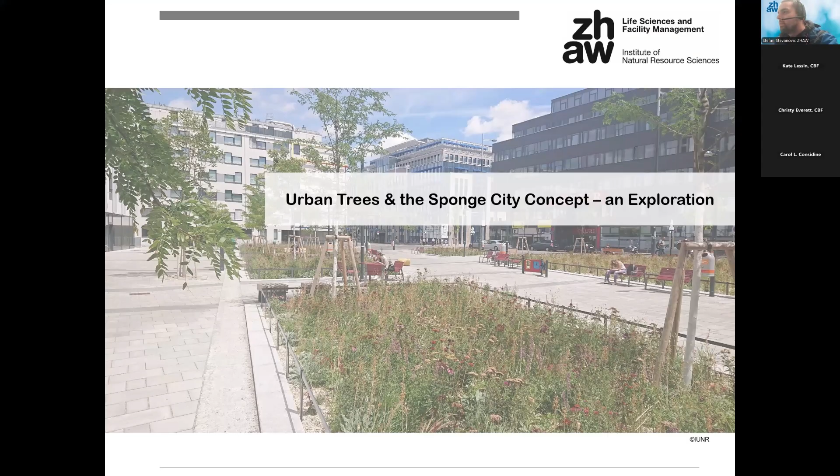But in any way, I will warm up and give you hopefully interesting input how we are dealing with rainwater and urban trees, and help you hopefully with your challenges and your difficulties.

So to start off, it doesn't look like that right now, unfortunately, but that's the campus of our school, Applied University in Switzerland, in Zurich. We have a wonderful view over the lake, and we have a little bit of a view on the mountains when it's not cloudy and foggy and cold. So a really nice place where we can do all kinds of experiments and projects.

And I wanted to make you guys a little bit jealous as well, since you have better weather, or warmer weather than I have.

Switzerland is usually known for cheese and chocolate and maybe banks and money. But also hopefully at one point for sponge cities. Some people call it sponge cities, other countries call it water sensitive cities or sustainable rainwater management and so on. Sponge city comes from China. They were the first ones who called it that way.

It's a concept. They described it the first time as a city that acts like a sponge, and they noticed after a short period of time that you can't really say what is acting like a sponge or not. So they had to define it a little closer: it acts as a sponge if the water gets absorbed, stored, allowed to seep through, purified, and as a last measure, released into the canalization, the sewer system.

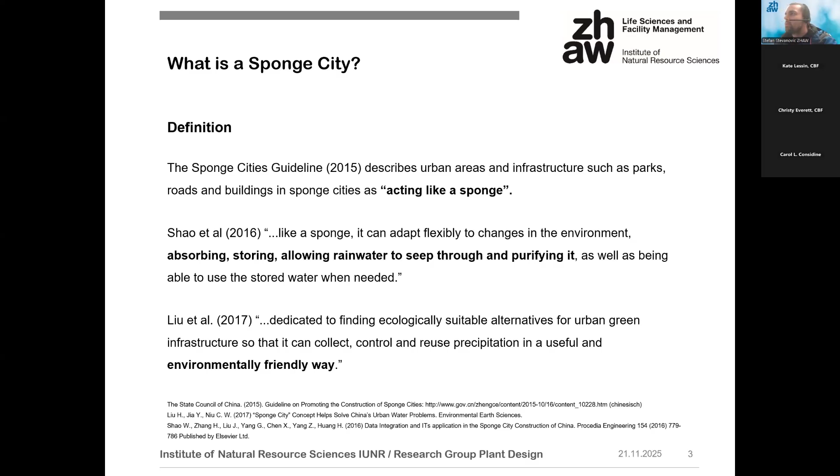One year later, Liu mentioned as well that it's not just to deal with the rainwater, but also to use it in an environmentally friendly way, as close to nature as possible, which was kind of the final sponge city definition. Until today, there's not really a definition that sums everything up together. But that was the idea. And it was also a starting point to no longer see rainwater or stormwater as part of our sewer system, but more as a resource. We want to use it in our cities in some way.

For those reasons, they had to set some goals to reach, where they said 20% of the urban area has to be under sponge city standards. Now you're maybe asking yourself, what's the sponge city standard? They said 70% of the precipitation has to be used locally until 2020, and until 2030, 80% of the precipitation. I was in China last September, which was a really interesting experience, and they were capable of implementing that pretty quickly since they don't have such bureaucratic ways, not so many administrative challenges.

And they didn't just say we have to use all the water locally. They also said each sponge city measure has to have infiltration, retention, storage, purification, evaporation, and then, as the last, drainage. So every time they built something for the sponge city, they had to fulfill those standards. And when a city reached those 20%, they called that city a sponge city. It's also important that they focus on the current state of the ecosystem and so on. It's not just constructing a building to reach that goal, but also seeing what else is going on around.

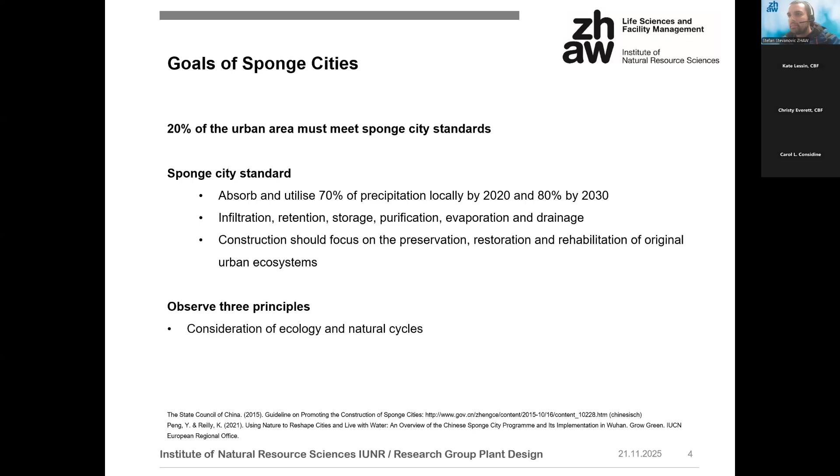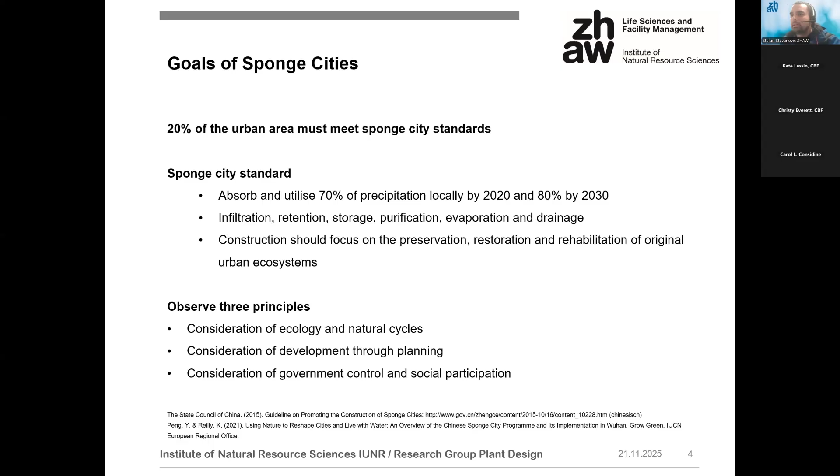They also had some principles. It was important that they keep some kind of natural cycle and also use the water in a cycle, that they consider the development of current planning, governmental control of whether everything is working as it's supposed to, which is less of a thing here in Switzerland, and also some kind of social participation when they implement these measures. That idea in China came mainly because of many floods and so on.

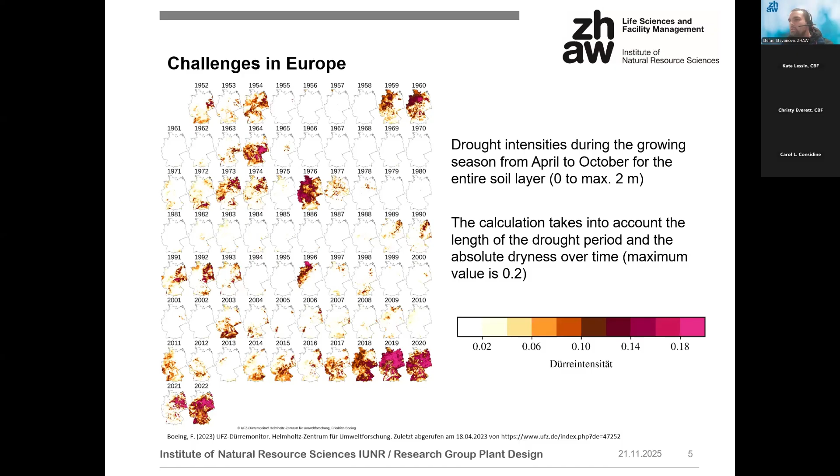And in Europe, we are blessed with enough water. But what's even worse are the summer periods. Take the example of Germany, because they collected this kind of data: we have really dry summer periods, which is not just a problem on the surface, but also in the depth. We have complete dryness up to 2 meters into the ground. You see the maximum value would be 0.2. This pink color is the absolute maximum dryness that we have. And you see between April and October, we have complete dryness up to 2 meters, which is a huge problem in nature generally.

In Germany or Switzerland, it's not that common that we have forest fires and so on. But suddenly we have these kinds of problems, and you can imagine how it looks later on in the city. Two or three weeks ago, we had a new study by the best scientists in Switzerland, who collaborated and tried to simulate the weather in 40 years.

And yeah, it looks like in 40 years, in the worst case scenario, rain events that we had every 100 years will suddenly happen every 30 years. And heat periods of 4 days over 30 degrees on average, which so far were a normal standard, happened 4 times per year in Switzerland. Now in the future, we will have 25 to 35 days.

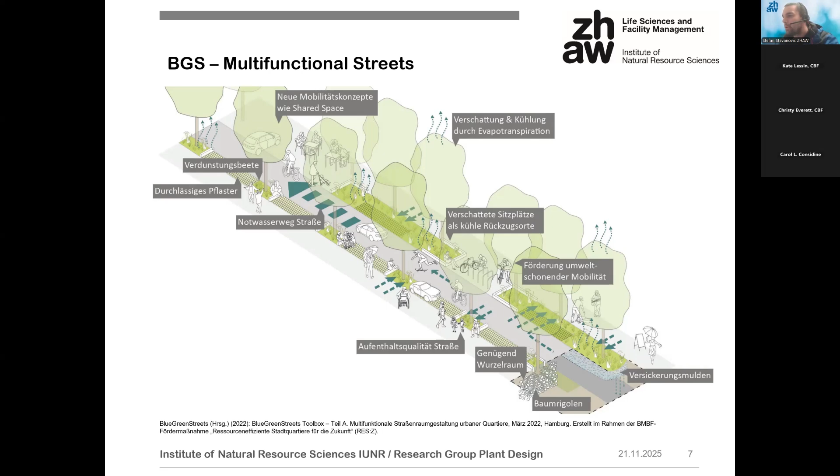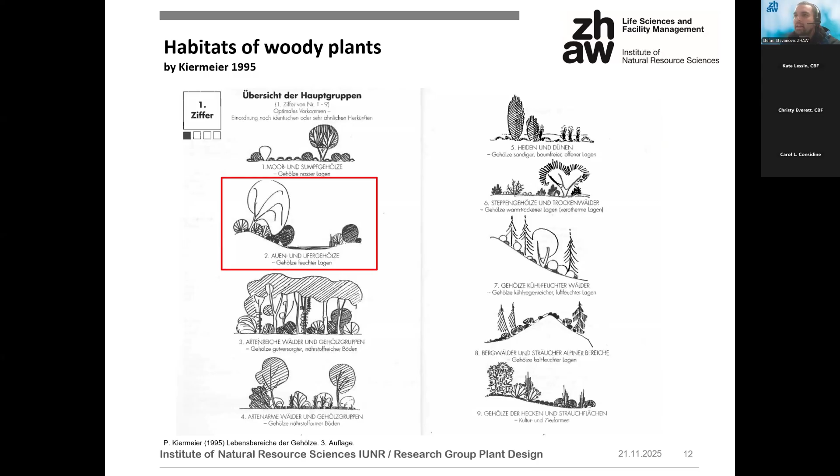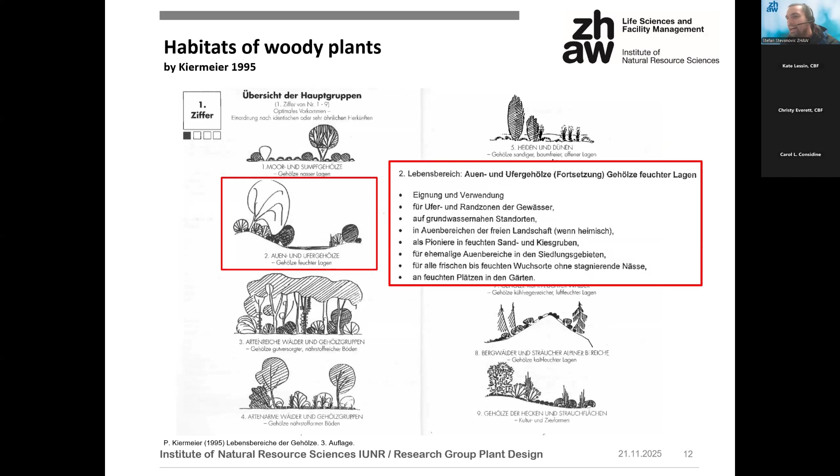And when we build a sponge city, or want to use rainwater, we look at trees that already know high groundwater, strong rain events, but also dry periods. So this is the area where we look at which types of trees we have. Unfortunately, everything is in German, but maybe you can translate it later when I send you the slides. We have Kiermeier from 1995. He selected different tree species by the regions where they live.

And the same thing we can also do in Switzerland. We have these glacier holes, made by ice and snow and coldness, as it is right now, where we have also some kind of cascade and water management that flows from one hole to the other, that we try to implement into the cities.

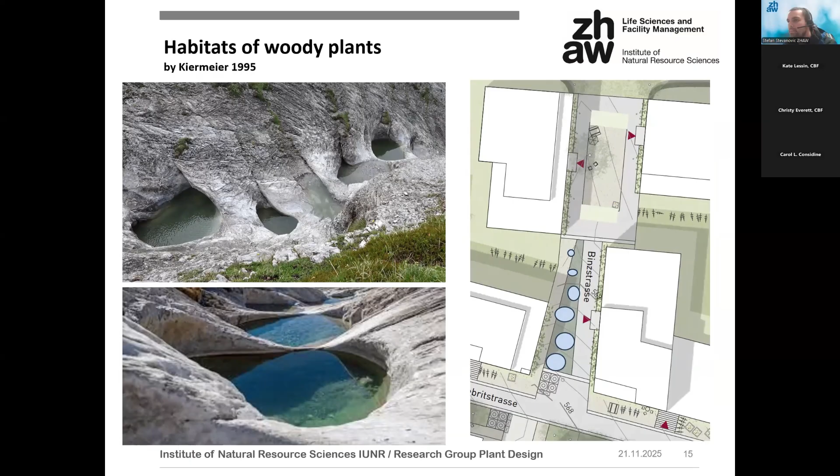This is a project in Bern, but this kind of environment is also a natural sponge. Maybe you don't see it in the first place, but when the snow melts, we have floodings, and the water can flow pretty easily from the left to the right and get soaked up in this kind of soil environment with a lot of gravel stones that create a lot of volume under the ground, a retention area. And we have this well in the city.

If your imagination is a little bit wider, you see the mountains in the background, you see the green area and the freshly implemented trees and vegetation under these rural circumstances, and you have a big, long river that is now the train going through, but where the water can be soaked up and has some kind of drainage function in the city.

So if I skip one more time back, you see the mountains, the trees, and as well here our little river. I'm going pretty quickly through it because we have limited time. You can ask more questions later on, but I want to share as much knowledge as possible.

So the roots are usually growing outside the tree crown. That's the area where the fine roots are built up, and the fine roots are responsible for soaking up the water and the nutrition and so on. So outside the crown, the tree canopy, that's actually the most important root part of the tree. And if we place concrete around it, it gets really difficult for the tree to absorb any water.

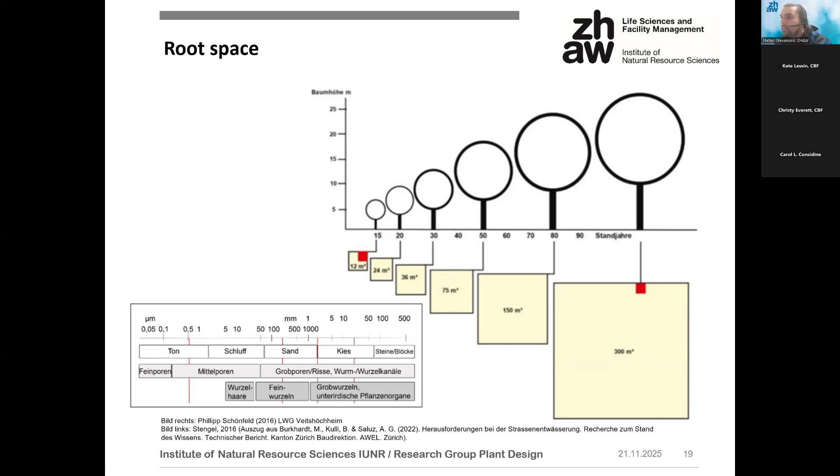And then, of course, the tree will get up to 15 years and maybe 5 meters high, which is not enough to create enough canopy volume over the whole city. And if we want to have 80-year-old trees, we need 300 cubic meters of root space. And if you don't have enough root space, then these kinds of events happen. They have really small roots compared to the crown volume, and then you have one or two storms, and that's enough to break the trees.

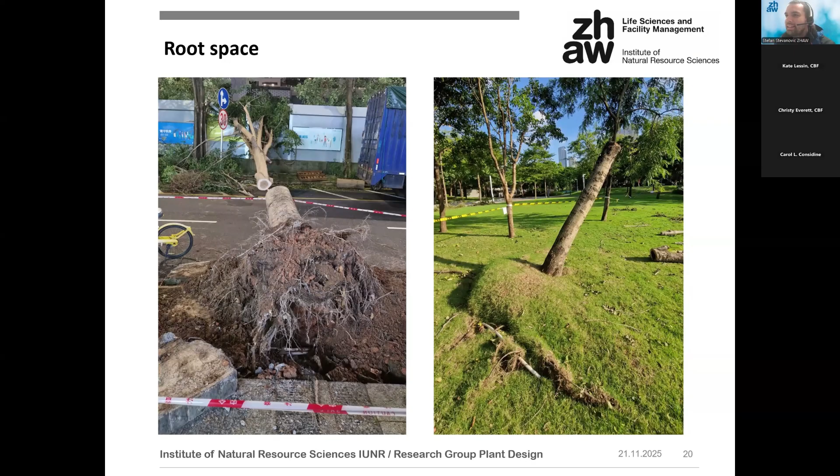In Zurich, we also have a reduction of the tree canopy over the last years, and they said it was not the government's fault, it was the storm's fault. So yeah, political strategies how to get votes, I would say. But actually, it's because they didn't have enough root space.

So we came up with a solution that was invented kind of in Stockholm, but Cornell University also implemented it. Big crushed rocks that can hold a lot of weight from the street built over them, and the pores between them won't be compacted because all the weight is shared over the other rocks. And these big pores will be filled up.

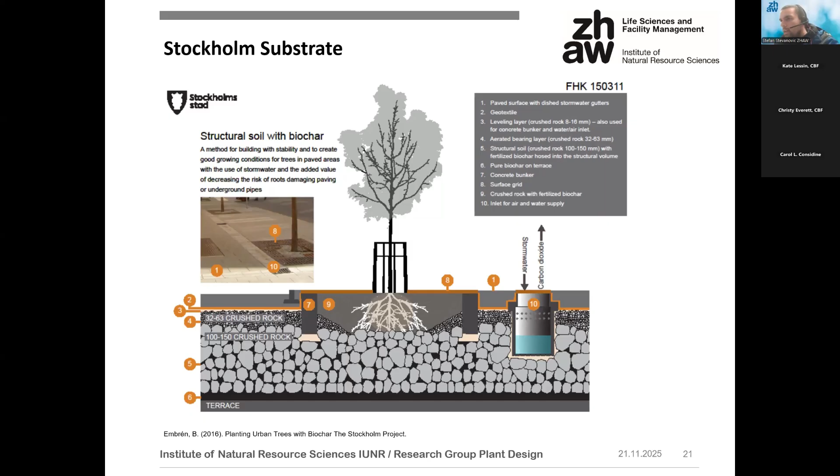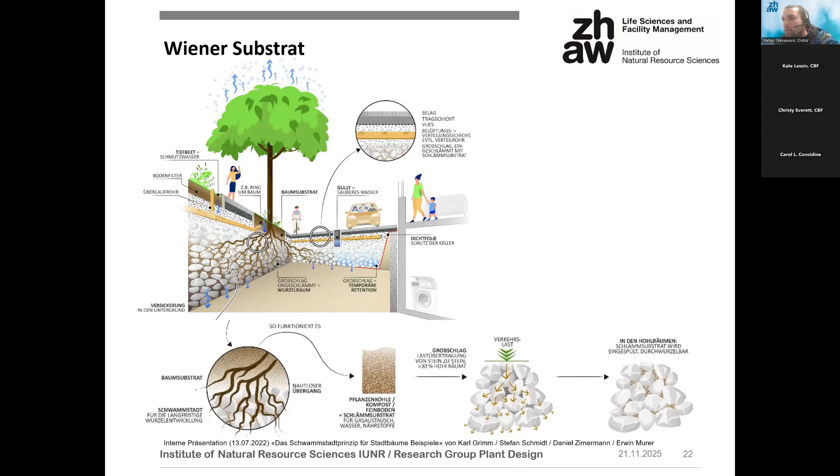In Stockholm, they filled them up with biochar that can absorb more water and nutrition. Later on, the trees can grow through those pores because those are the areas that are not that compacted. And Stockholm also used some kind of inlets for air and water supply. Vienna in Austria did a similar thing, but they used pipes to share the water around it. You also see a nice picture of how the weight from above gets shared over each gravel stone.

And then, of course, we had to implement it in Switzerland as well. The first time we implemented it was in Bern. It's a small Sponge City pilot project, really small. It's a small parking lot.

Bern is our capital city. You see it fits in a small picture of a presentation, not that big, but it's a UNESCO World Heritage Site. That was a little bit difficult to build it in. And for that reason, you see also surrounded by a river. For those reasons, we were allowed to implement our project a little bit outside on a cemetery.

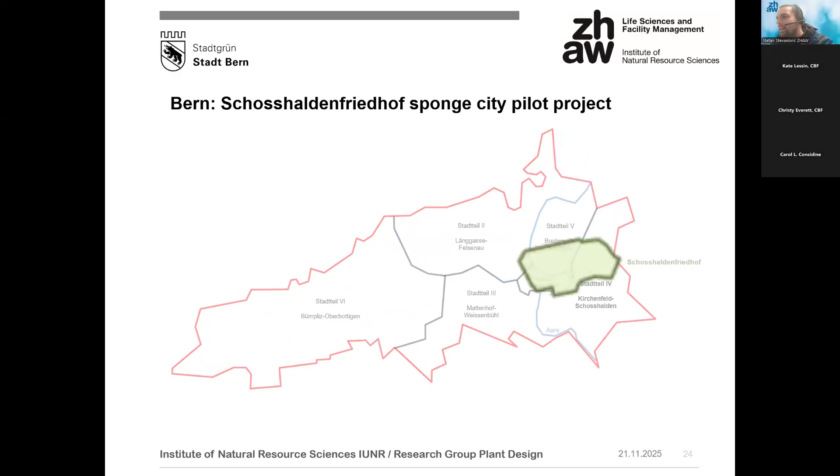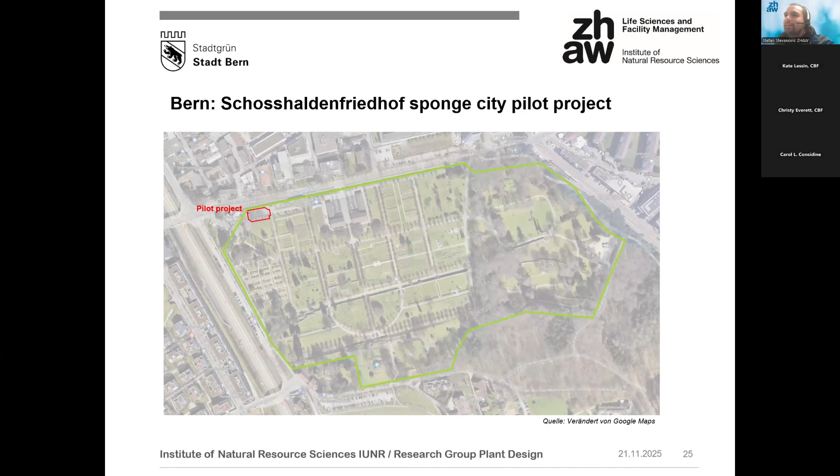This cemetery is a little bit outside because if something doesn't work as it's supposed to, no one would see it. And even in this small cemetery, we got a little pilot project area, a parking lot where we were allowed to implement those trees. We planted the trees in this kind of substrate. You see in the basic layer that we placed it in.

It's also important that on the ground of this area, we have some kind of, how do you say, like a fall where the water flows away or to the tree. Because the worst thing that can happen is standing water underneath the ground. Standing water anywhere in the nature is always bad. That's the area where we have the bacteria. That's the area that we have some fungus and so on, illness. If it's on the ground or above the ground, then we have mosquitoes and so on.

I'm checking the time to hurry.

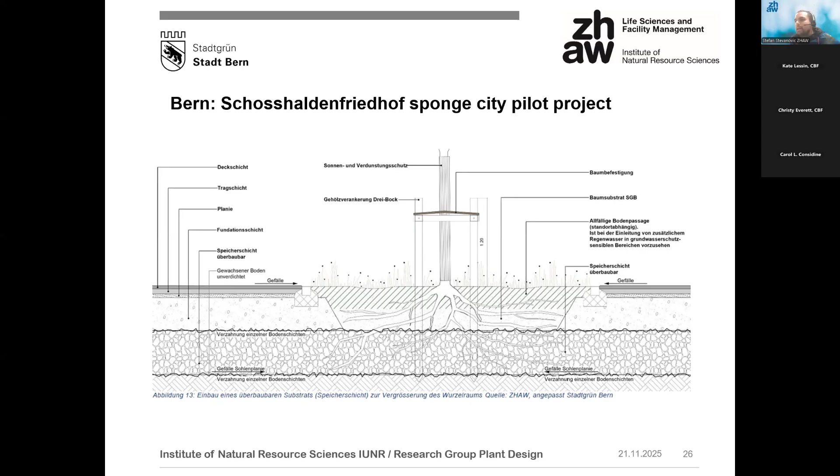And that absolutely should not happen or never happen. So we have this substrate in the lower area, and then we have a little bit of finer substrate that is above. And the goal is that the trees can use left and right underneath this pavement, the area, and get those ideally 300 cubic meters of root space.

This is how the substrate looks like. You see, Bassuk is a US researcher, I don't know if you know her, from Cornell University, that also tested it that way. You see each gravel stone can take up this force. This is the parking lot from above. You see in the middle this green area that was not implemented before. That's where we planted 5 trees. You have the orange area that is like a permeable pavement where the water can flow through it.

We have sensors. This is the red X on the picture where we measure the moisture and compare how the development is underneath the ground. We have also biochar implemented in like dots. This is the white dots or beige dots, where we are trying to force the trees to grow their roots in a certain area and direction, and measuring with transparent pipes into the ground. That's the black dots, where we put a special root camera and take a picture and see if the trees reached that point or not. So that's our project that we implemented and are following up.

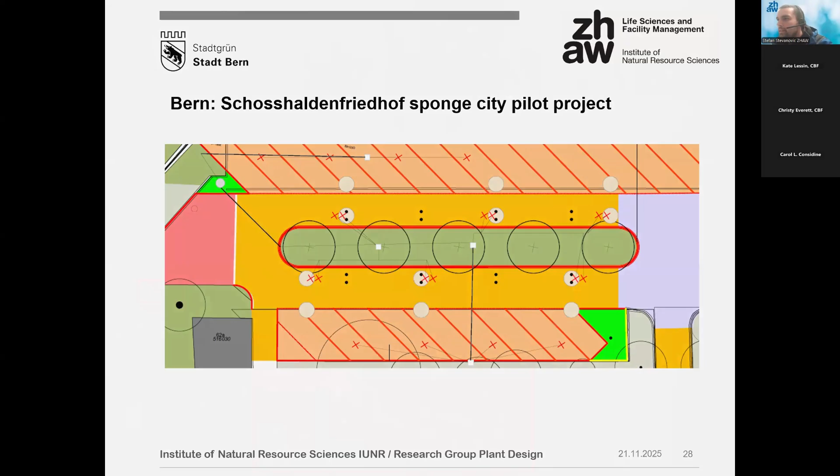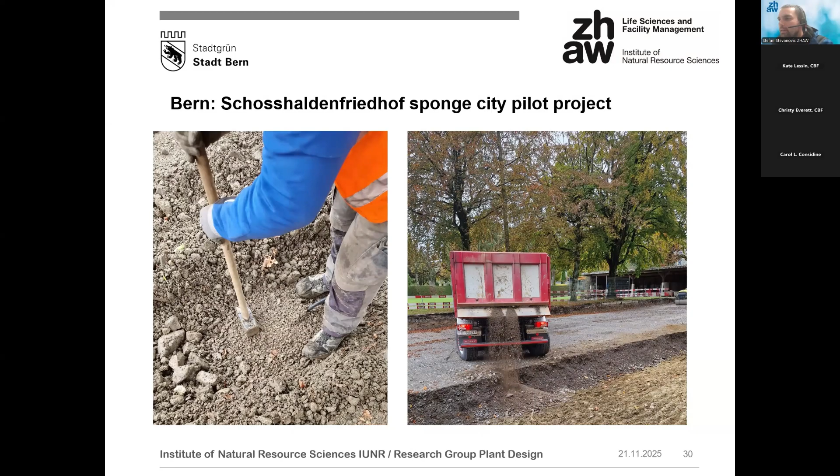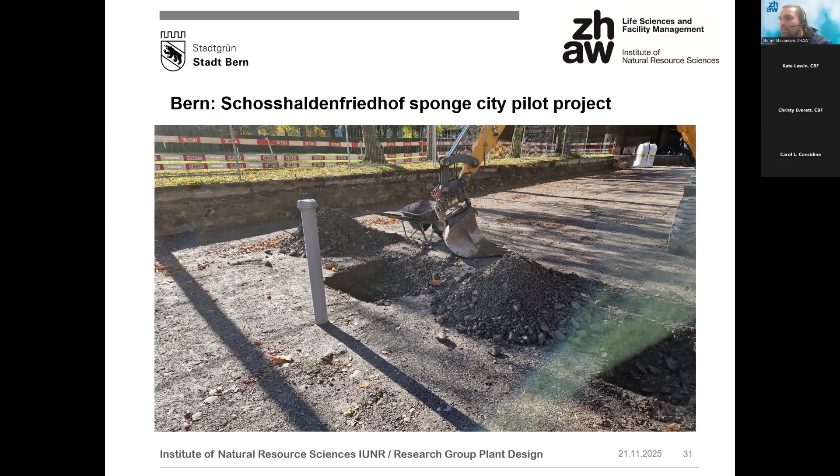This is when we implemented this biochar that we mixed in these little dots around it, where we didn't want to implement it all over the place because the trees should still search kind of for nutrition and not use everything on site. Because the trees, when they come from the tree nurseries, you can compare it, they were in an all-inclusive holiday, enough water and nutrition, and suddenly we cut off the roots and placed them somewhere into the cities where they're under stress conditions.

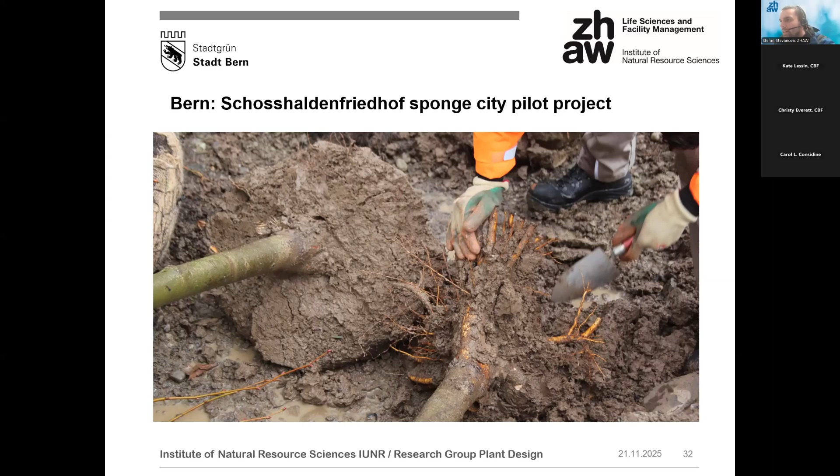You see, it was wet and loamy and horrible for the roots. The roots can fit in one hand, kind of, but at the same time, you have in the back a huge crown. How are they supposed to give them enough water and nutrition to get this big canopy cover that every city and every landscape architect wants to have? That's not possible. So for that reason, we had to prune back the roots that are completely broken. We had to prune above the trees. You see, in the end, it looks like a little stick looking out from the ground.

And that was horrible for the city. All kinds of politicians came out and said, "Oh, how could you do that to our trees? You ruined everything." Luckily, we had the support of the tree competence leader of the city, and he said it's totally fine. Now the tree actually has a chance to grow because the roots are equal to the crown volume. Actually, in nature, the root volume is supposed to be 1.5 times bigger than the crown volume.

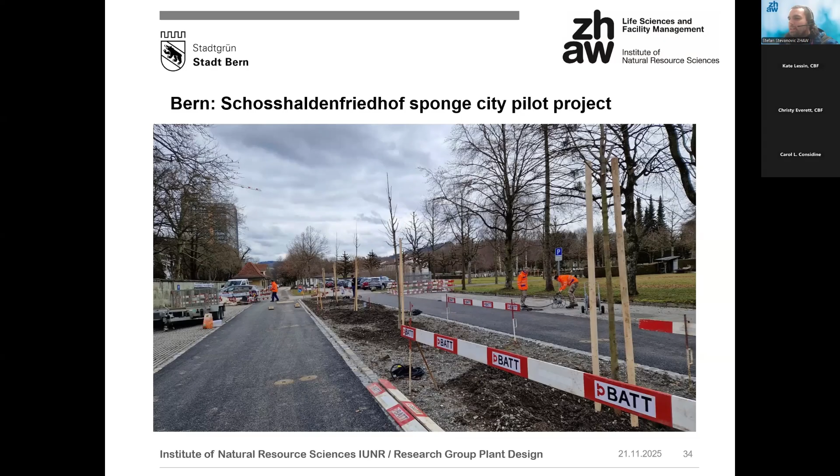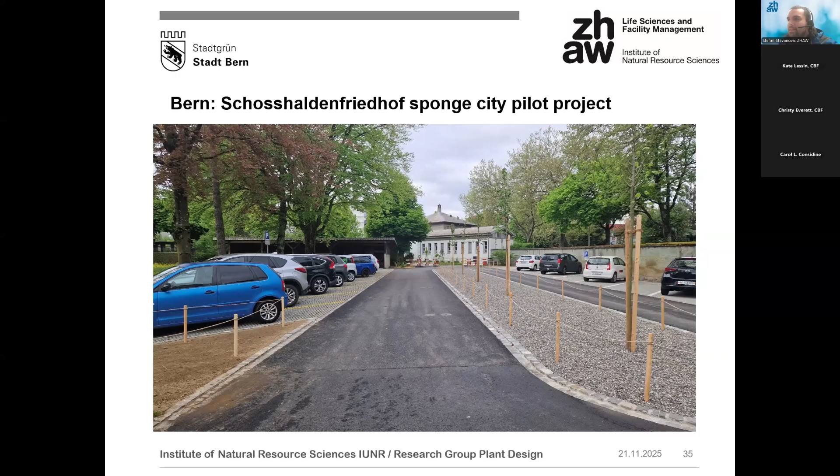And if we plant trees directly from the nursery, usually the opposite is the case. So for that reason, it looks really brutal, but just a few months later, they grew completely back, and now each year they have over 1 meter of growth at that site, and we could prove that this concept kind of works. We also implemented it in Zurich and on our campus, which we are following up. Because of lack of time, I shortened those slides.

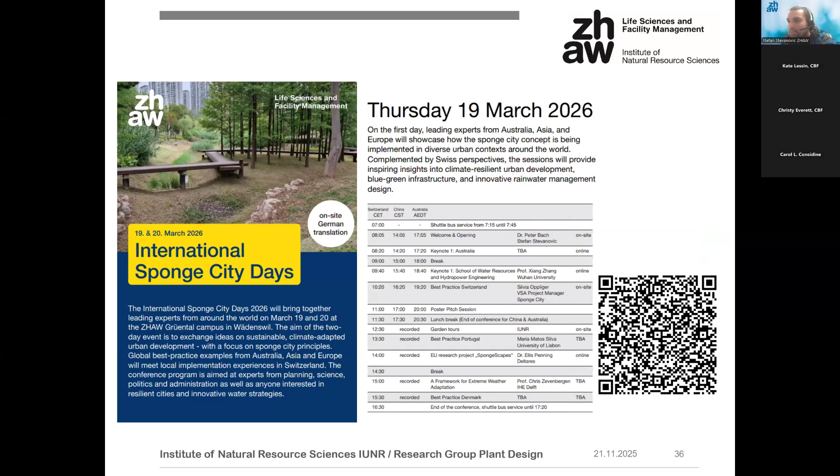You're more than welcome to visit our wonderful campus. It's small and tiny, but it's still wonderful, especially during the springtime.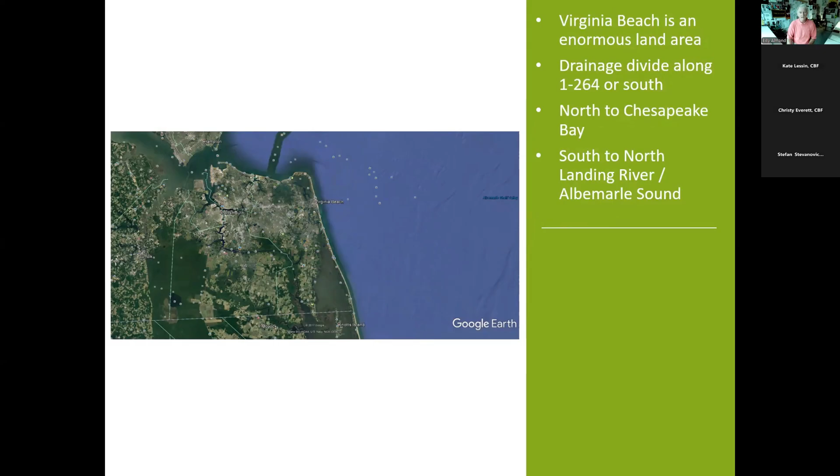We basically have three watersheds, if you will, four watersheds. We drain to the north to the Chesapeake Bay. We drain to the south to the Albemarle Sound into North Carolina, to the east to the Atlantic Ocean, and to the west into the Elizabeth River. All these northern areas are governed by the Chesapeake Bay Preservation Act, and the Southern Rivers Watershed is an enormous watershed that we deal with in terms of design.

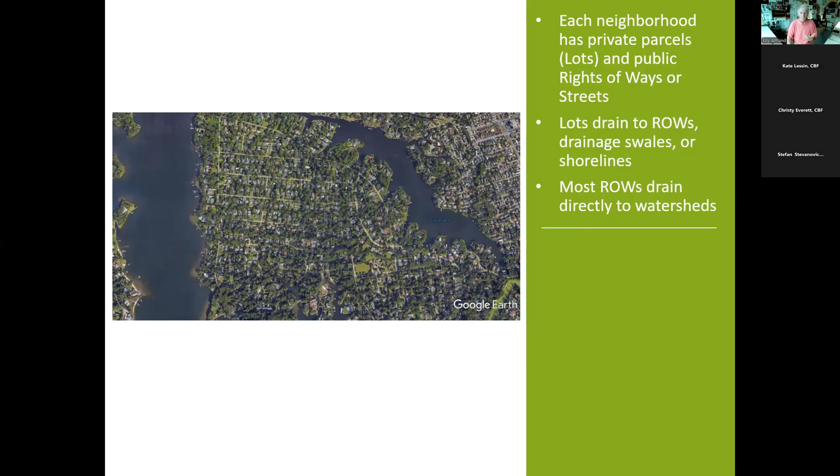So as a designer, what I'm trying to talk to you all about today is we are fortunate enough to have a really strong residential practice. And so we have the opportunity to get to multiple sites along watersheds. And our goal has been to improve water quality one site at a time. And so each neighborhood has private parcels, public right-of-ways to get there. Lots drain into the right-of-ways, drainage swales or the shorelines. Most of the right-of-ways drain right into the watersheds.

So in a typical neighborhood, again, lots normally drain by sheet flow. They have ditches or swales or catch basins that convey rainwater to the outfall into a watershed. A typical residential parcel in Virginia Beach has drainage that's either A drainage, where it drains from the back to the front, or B drainage from the front to the back, or AB drainage with a high point in the middle. And the water drains in either direction, but it all ends up in the street.

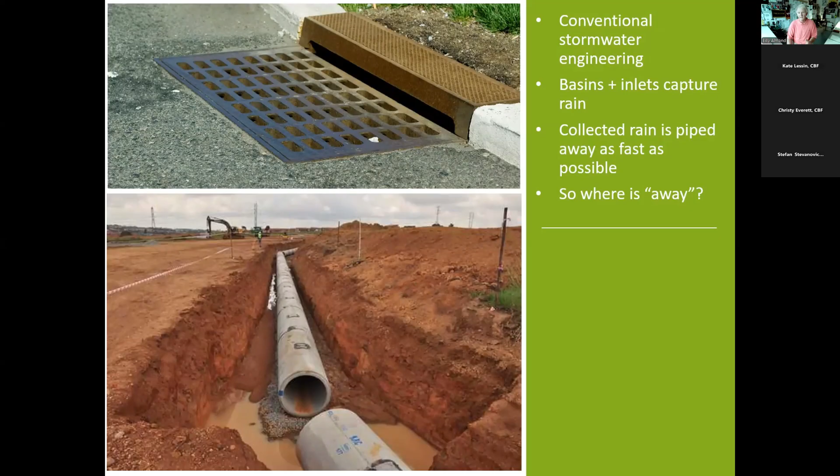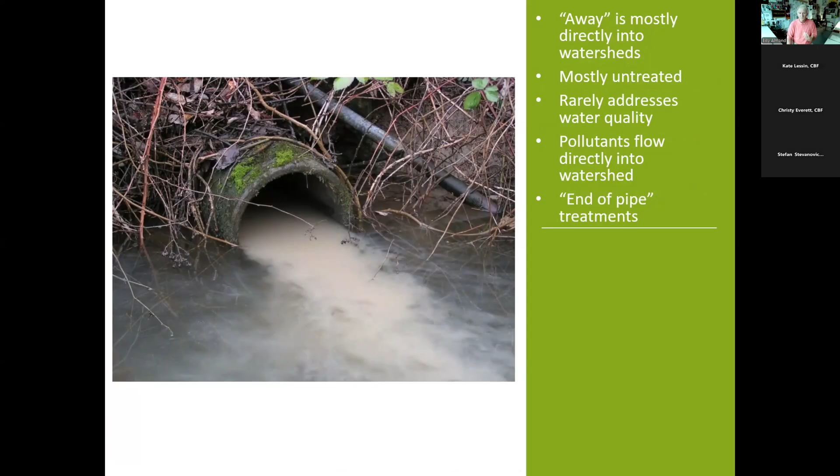And conventional stormwater engineering, we've all grown up with this. Basins, inlets capture the rain, put it in a pipe. We get it away as fast as possible. That's just the way it's been for decades and decades. And so where is away? Well, we all know where away is. It ends up in a watershed, in a lot of cases not treated, rarely addresses water quality. Pollutants flow directly in the watershed. A lot of our conventional stormwater management are end of pipe treatments.

So what I'm going to talk about today is from a landscape architect's perspective on different ways that we deal with and address stormwater management. Regulations have been overhauled over the last few years. In 2014, the major overhaul of the stormwater regulation was actually written by a landscape architect, Scott Crafton, who was my classmate at Virginia Tech, wrote those ordinances. Many, many options for rainwater management now.

Honestly, the first big rainwater management project in the country was Central Park. It actually was a sanitary sewer project where Manhattan was just down at the tip and they were pumping sewage and everything else up north into this big, gigantic area, and the city engulfed it. Now it's one of the most sought after public spaces in the country, if not the world. The highest lease values of any property in Manhattan are around Central Park.

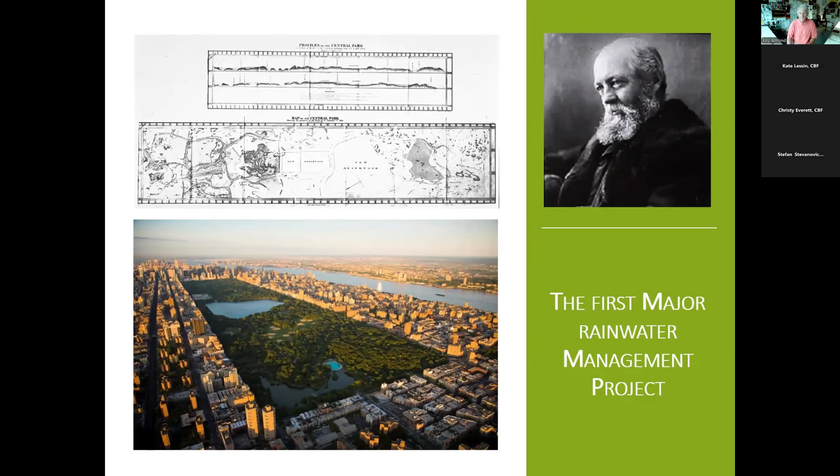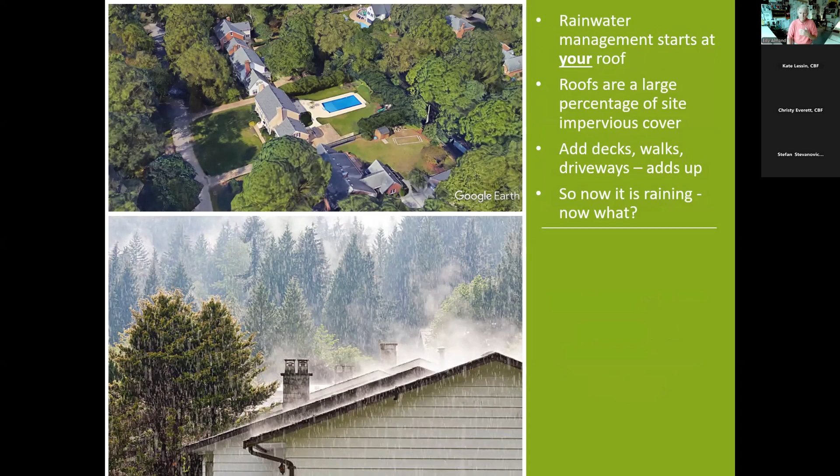So rainwater management starts at your roof. Roofs are a large percentage of site impervious cover, in addition to decks and swimming pools. It all adds up. So now it's raining on your property. How do we address that? Well, clearly one of the simple things is green roof technology, and you all know about that. Everywhere we have the opportunity, we try to do green roofs. It absorbs and filters rainwater. We do get credits from stormwater reviewers. It additionally helps with heat island.

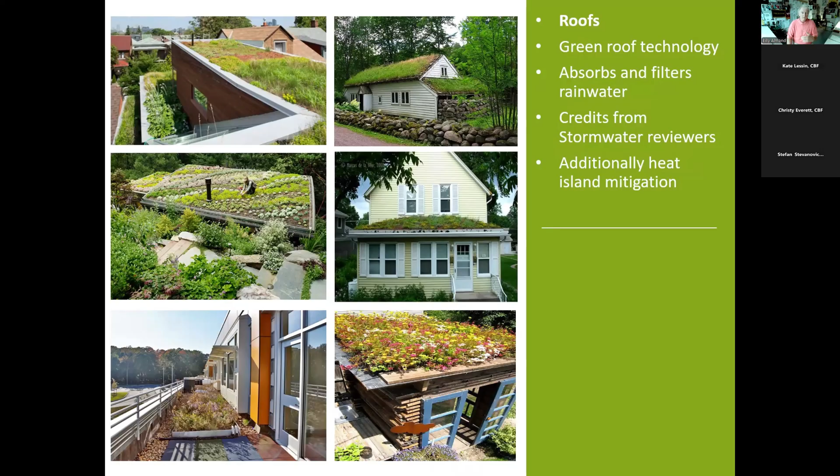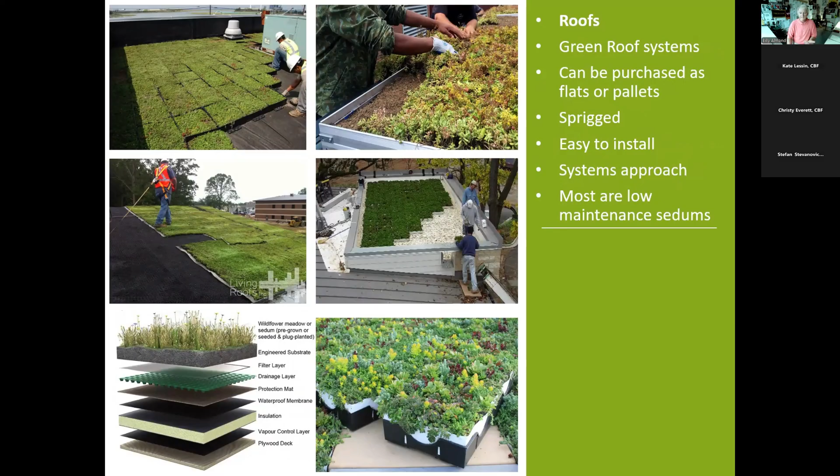It comes very simply in palleted forms. There are systems now, you can buy them on Amazon. They show up as flats. If you have a flat roof or a gently sloping roof, it's easy to install. It's really a systematic approach to dealing with rainwater. Most of them are low maintenance sedums with very little maintenance at all.

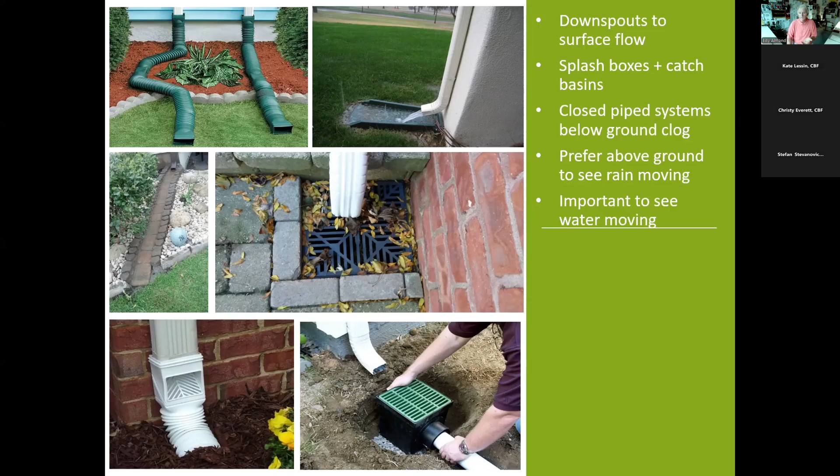We prefer to run rainwater above ground. Basins clog, they get covered with leaves. You're not going to be out there at 2 o'clock in the morning during a hurricane trying to keep your drain open. We think it's really important to see water moving.

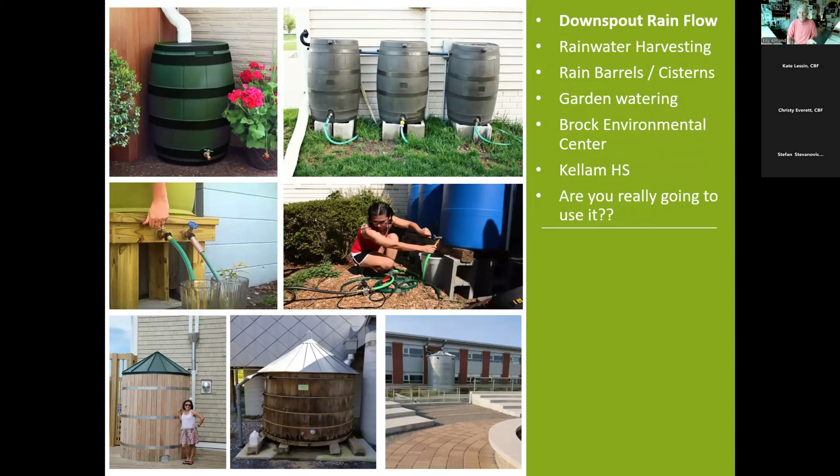Capturing water, rainwater harvesting, we've been doing this for years. Rain barrels, cisterns. Brock has got a really cool couple of cisterns. We did this at Kellam High School. The big question, are you really going to use the water? And we found that most people just think it's nice, but they never ever actually use the water.

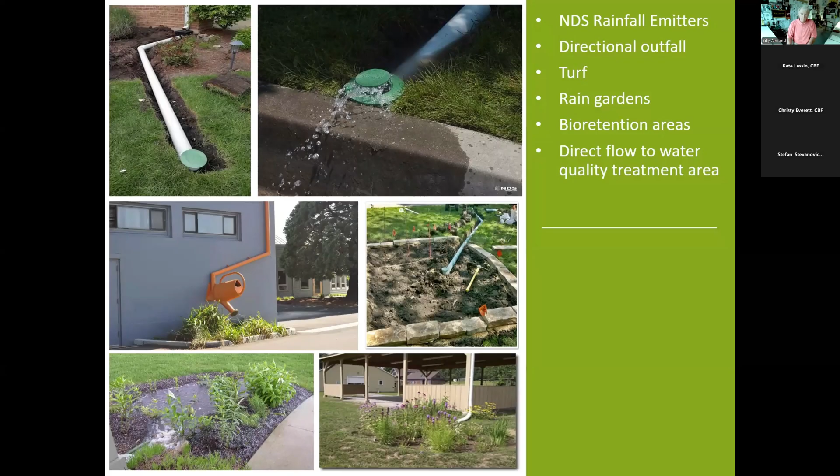There are a lot of residential grade rainwater systems. NDS is a company that manufactures something we use all the time, which is a rainfall emitter. You can see this in the top, where the head pressure coming down from the downspout will actually push this up and water will gurgle out curbside. Or, most of the time, what we do is we take it directly into a rain garden. That way we can get water directly off the roof, directly into a rain garden, and do some level of retention and water quality improvements.

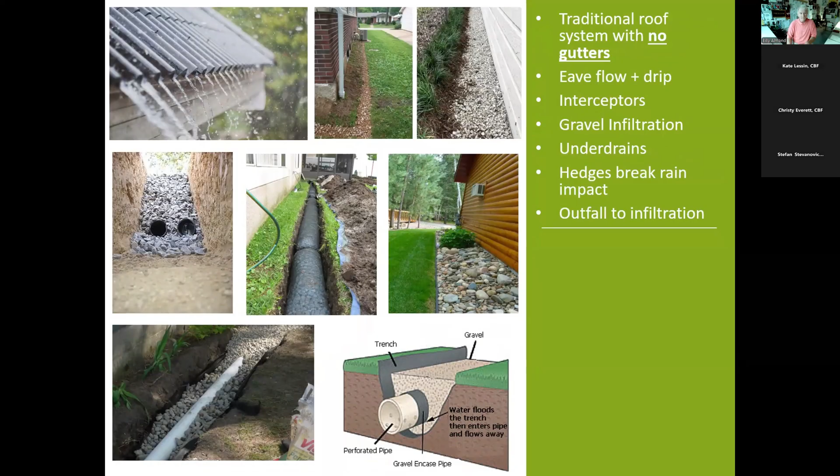Suppose your roof does not have gutters, and a lot of folks do not like to have gutters, and you have the water just coming directly off the eave. So we create drip interceptors around the base. They could have drainage socks below or gravel with perforated pipe. Lots of different ways to address this. Or you can do what they did in Williamsburg in the 1600s, and build a beautiful brick swale. But that water, again, has got to go to a drain and got to go to an outfall. So we're always cognizant of just where that water goes.

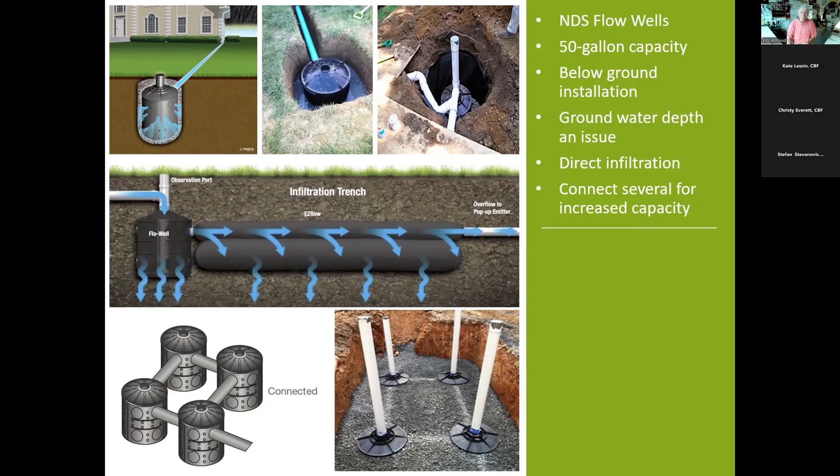NDS makes a flow well system. Each one of these containers captures 50 gallons of rainwater and slowly leaches it into the soils. These can be connected up to 50, 100, 150, 200 gallons, and that becomes your reservoir of rainwater that slowly leaches into the ground. There's infiltration trenches, and you can see down below where we stack these flow wells together. It's important that the downspout doesn't connect directly to the pipe. We always want to disconnect so that they can be kept clean.

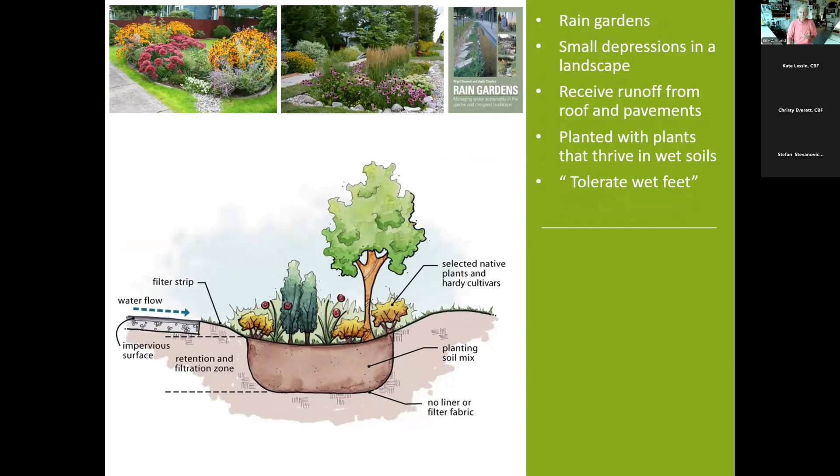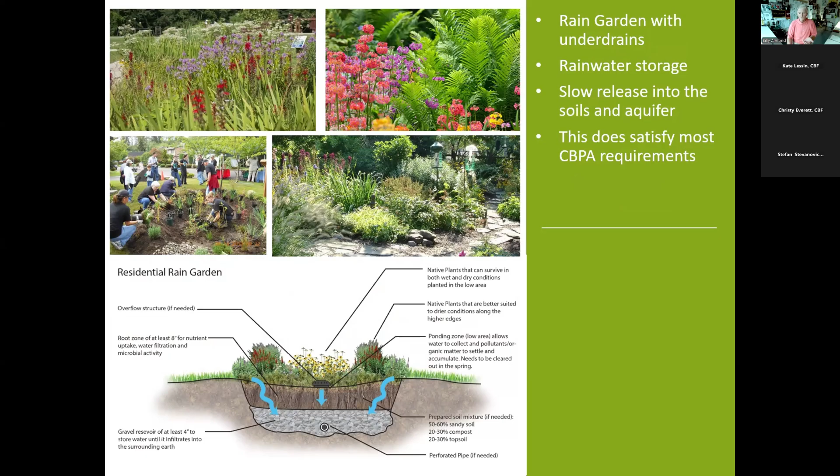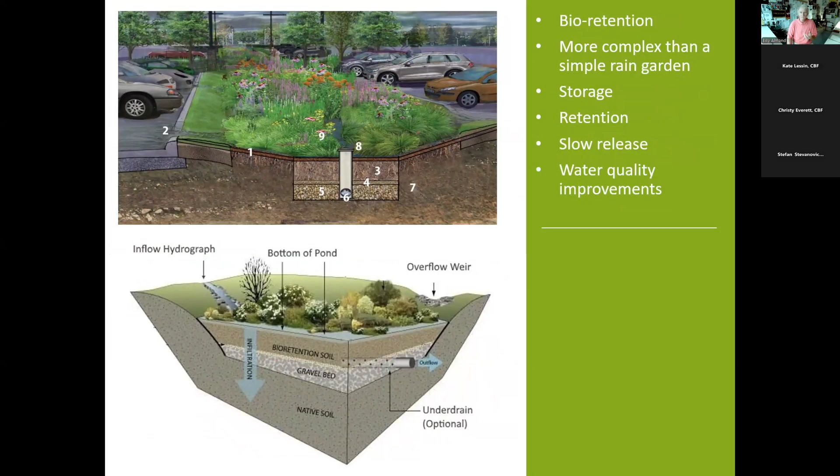Rain gardens, which I'm sure you all are very familiar with, are little small ideas we have on residential sites to create beauty, at the same time to capture some rainwater and possibly some pollutants that would be coming off managed turf. A little bit more sophisticated residential rain garden actually has an underdrain perforated pipe and gravel below, so there's a better opportunity for storage. This does satisfy most Chesapeake Bay preservation area requirements, and then you can get really sophisticated with bioretention. It's more complex. It deals with storage, retention, slow release, and has water quality improvements.

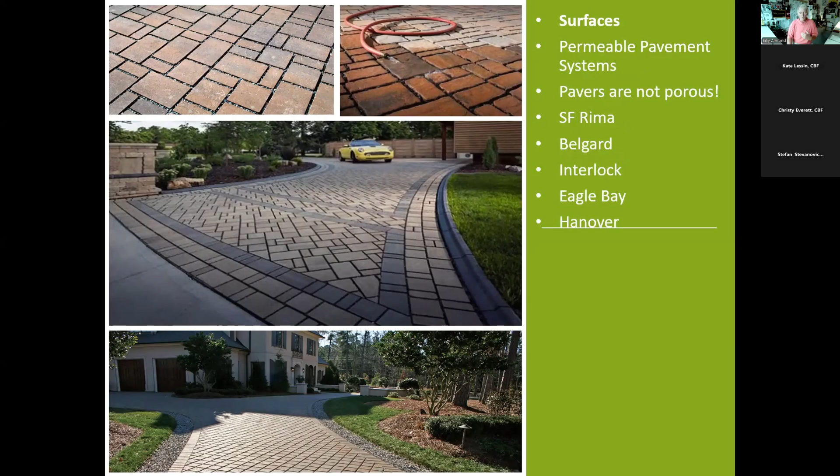We'll talk about pavements. The upper right-hand corner picture is the first permeable pavement project I ever did, in 1988. It was with Bowmanite, which was a product from California that's poured in place, that looks like that center photograph. And that is the parking for the chapel at Virginia Wesleyan University. It's been there for almost 40 some years and still works. Most of you all know about these products. You've seen them. But from an architectural standpoint, our clients are more inclined to use permeable paver systems like you see here: SF Rima, Belgard, Interlock, Hanover. They're very, very attractive, but they also allow for about 40% of permeability through that pavement section.

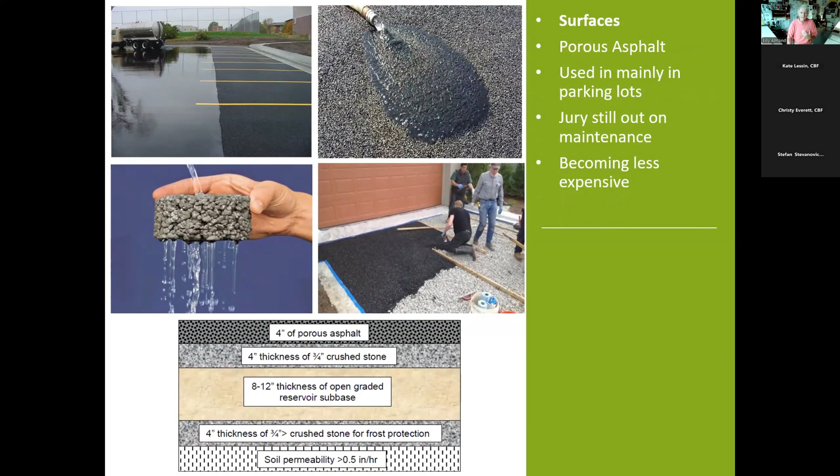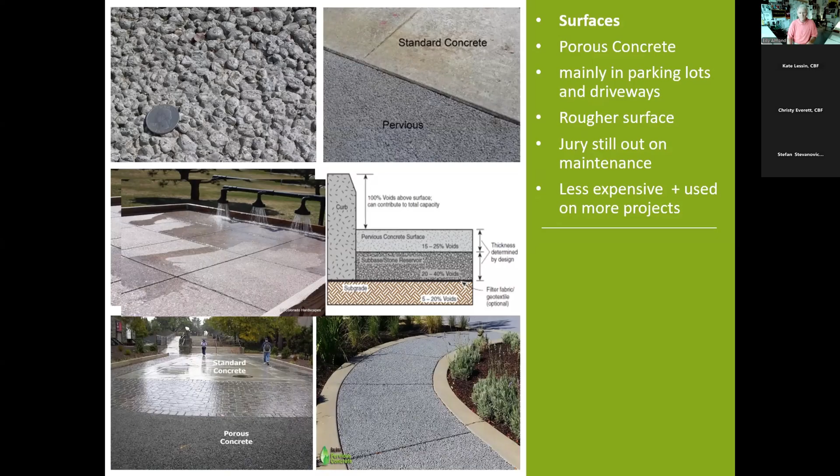Porous asphalt is done periodically. The jury's still out on maintenance on that, but that is a product that's available. It's becoming less and less expensive. Porous concrete has been out for a while. It's a little bit rougher surface. Again, the jury's still out on the maintenance. It's less expensive and seems to be used more on projects here.

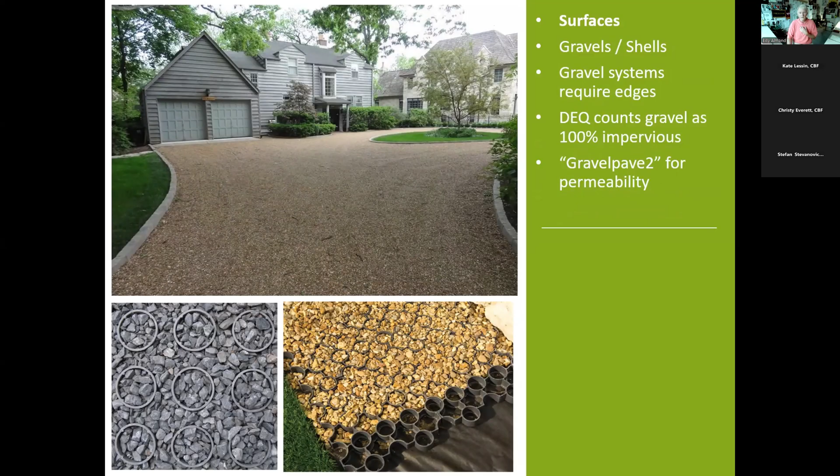Simple gravels. One would think this is completely 100% pervious, and it's not. DEQ counts gravel as 100% impervious. So we have applied this product called Gravelpave2, which is down at the bottom, which allows you to use gravels, keeps them in place, and allows water to go through. We've actually gotten credit from Chesapeake Bay Preservation Area work to be able to use that system.

Underneath the parking bays, similar to what Stefan was talking about, we have structural soils. And so what it does, it allows the root systems of these trees to grow out into those areas. There we get tree canopy, and we don't lose any parking spaces.

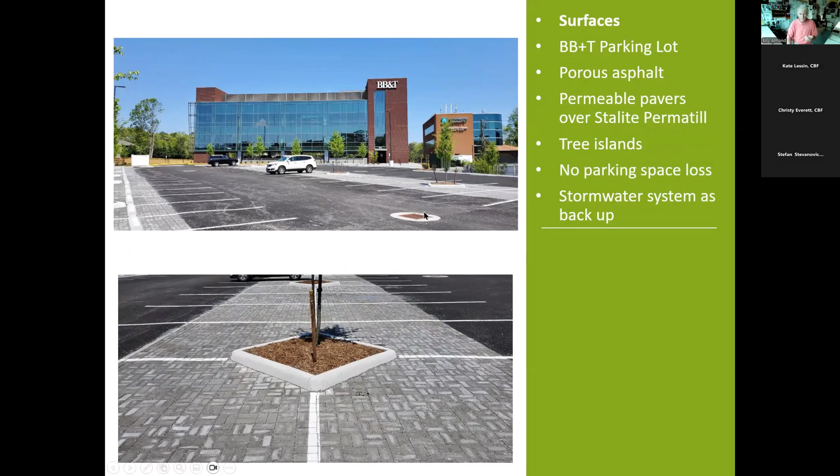So this is the BB&T Bank, now Truist Bank in Virginia Beach. This parking lot is 100% pervious. It's pervious asphalt, permeable pavers, and tree canopy. The engineer didn't believe me, so he put his own conventional system in there, which the water's never gotten to. Another product we've been using, and the city of Virginia Beach has been using, is Flexi-e-Pave.

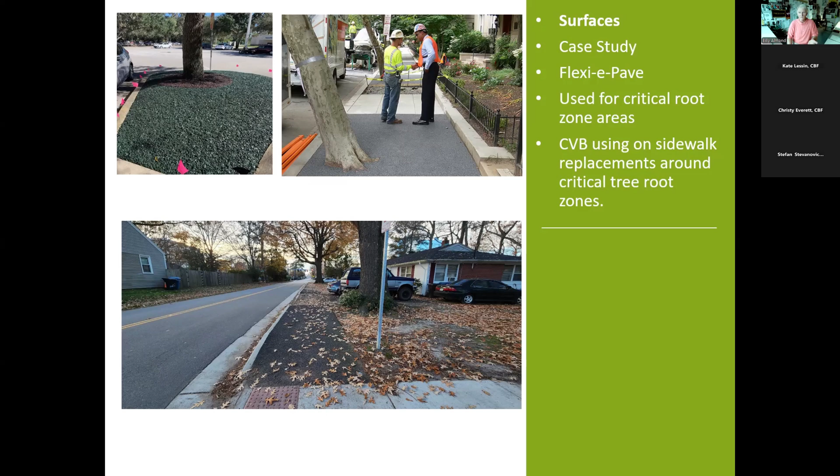And so where we have to do sidewalk replacement, where there are existing trees, we're actually using this product, which is a recycled rubber product. It's poured like cement, but water goes right through it and allows you to walk across it safely. We're using this product on many, many sites.

Recently, the UK has come up with the green-blue system. This is, again, out of the United Kingdom. It's a streetscape soil system where it's cells that actually are below grade. It's able to support pavers and concrete. You're able to put soil in there to grow trees. You're able to run your irrigation lines, sanitary sewer lines, and water lines through it. And it also acts as a sump for stormwater for streets.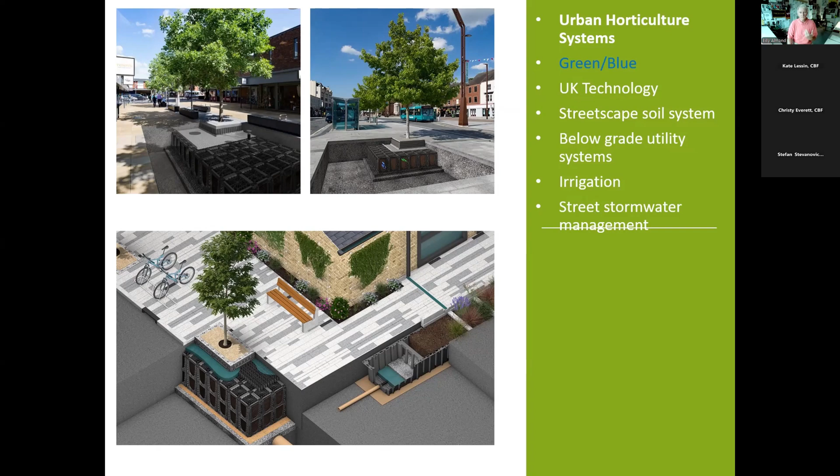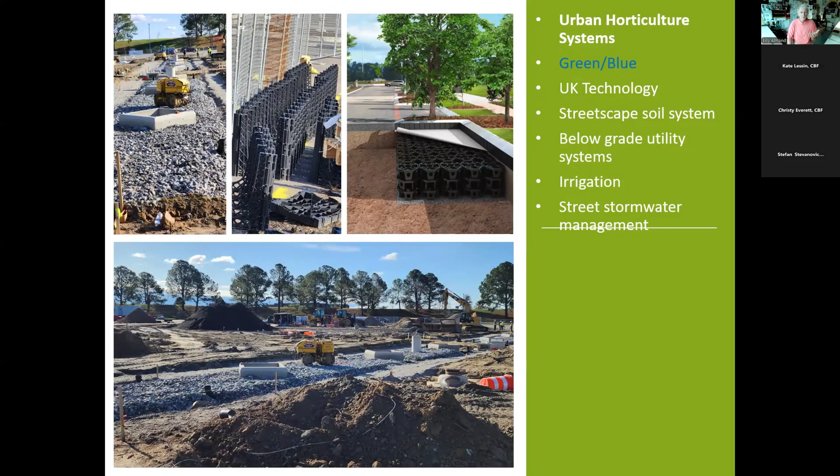And this is something that we've been using. This is an earlier shot under construction at the Norfolk Botanical Garden, where we're creating a parking garden using this system to get more tree canopy without losing any spaces.

Probably in the last 10 years, our whole concept of planting design has changed. It used to be that we planted tens of thousands of shrubs around waterways to meet the requirements of the Chesapeake Bay Act. Now simply, we don't plant anything. What we'll do is go out there and paint an orange line and tell people to stop mowing. And what they're now doing is doing successional managed meadows. It's a huge maintenance reduction. It takes mowing out of the cycle. We create these no-mow zones.

They're either mowed annually, like in February, to keep them down, but allows natural succession, or they can be seeded, sprigged, or planted with native wildflowers. We have found that in areas where we have flooding, multiple nor'easters in a row, this is the only thing we can do, because every plant material that says that it grows and it's salt tolerant will not grow in inundation. And so this is what we've been doing along shoreline.

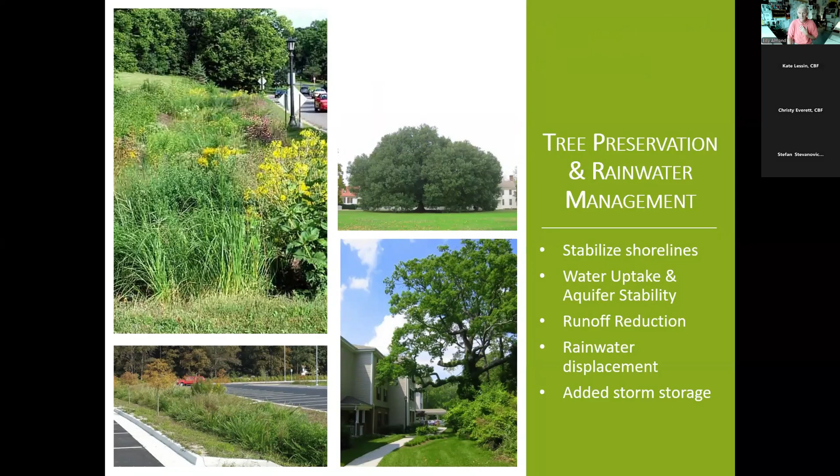A lot of discussion earlier with Stefan about tree preservation. It's a huge part of our practice is to preserve trees in perpetuity, not just for the few years they're under construction. A lot of work has been done in this. So Dr. Daniel McLaughlin at Virginia Tech conducted some research in the last 10 years.

He put soil probes in forested areas, calculated soil moisture at X, and then there was a rainfall event of Y, and then he calculated how long it took for that soil to dry out, and it became abundantly clear that large shade trees can process up to 40,000 gallons of rain annually. And so forests are rainwater pumps, and that's what helps us with recurrent flooding and sea level rise and everything else that we're dealing with. And that is why it's so important to preserve forests.

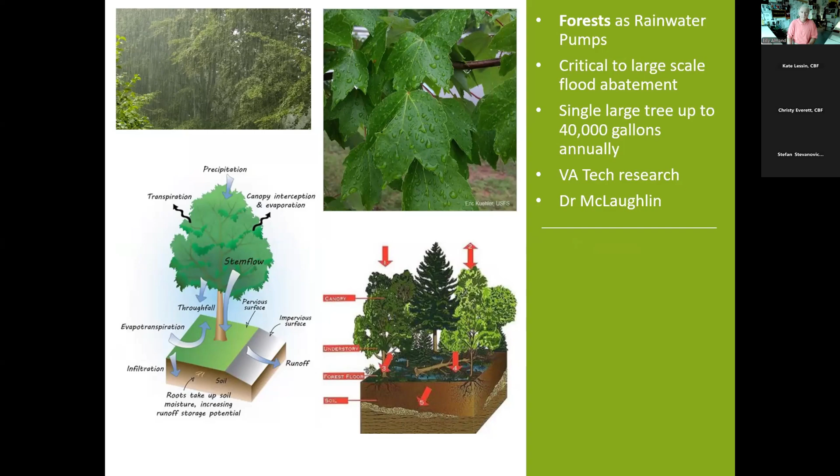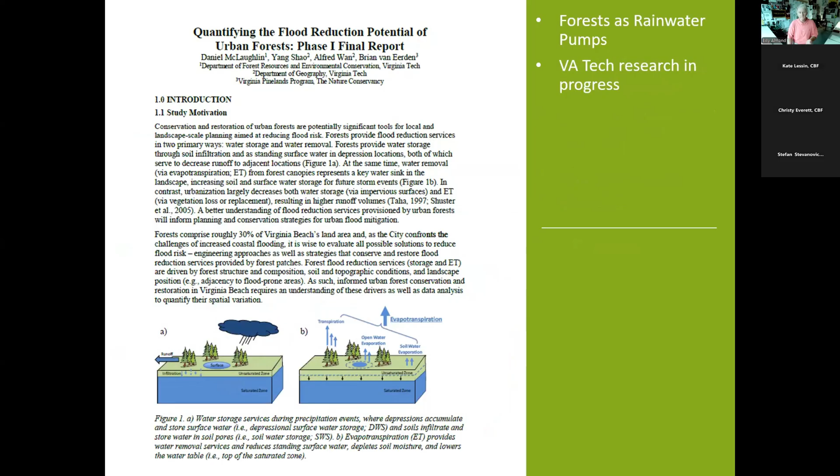An enormous amount of research has been done in the city of Virginia Beach by the Nature Conservancy as well as Virginia Tech on this very topic. And so what we have tried to do is to carry that forth, not only with our clients, but there was a big push in the General Assembly in the last few years for tree preservation bills. We finally got DEQ to add a minor level of water quality treatment to regulations in 2024 for trees.

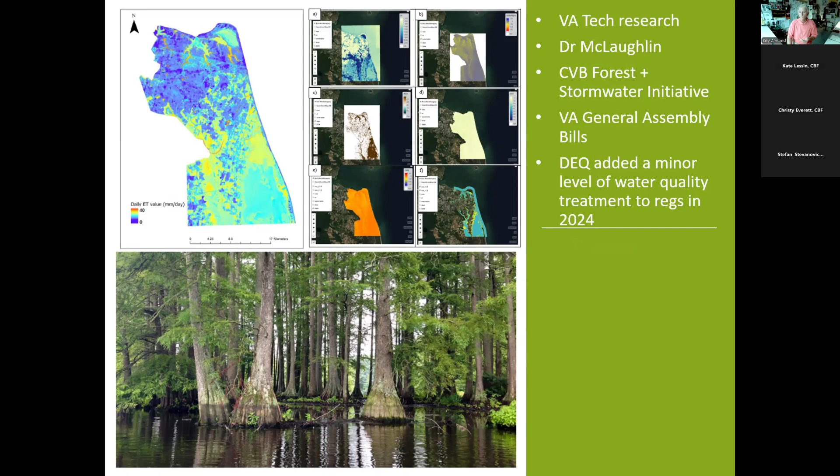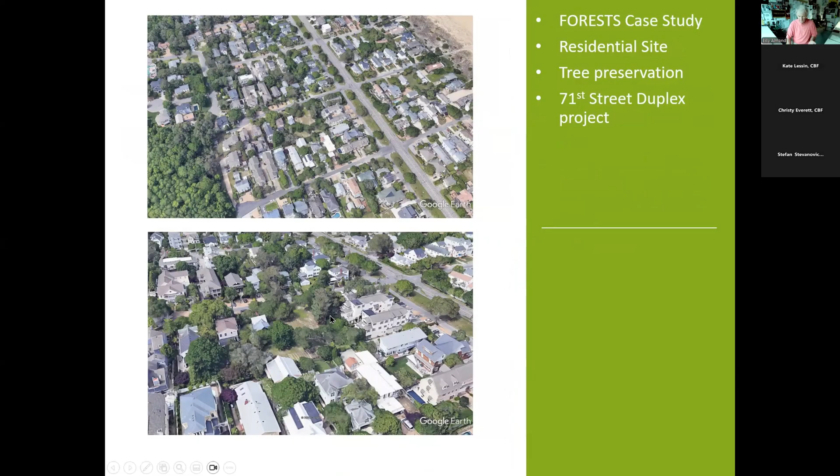And so that was just a big step in the right direction. This is a project we worked on at 71st Street that was vacant land, but had some rather large trees on it. It was a duplex project. Northern Virginia Beach is pretty well developed. This just happened to be a site right in the middle of it that was not developed. So we were able to actually do some monitoring and testing on that due to the development.

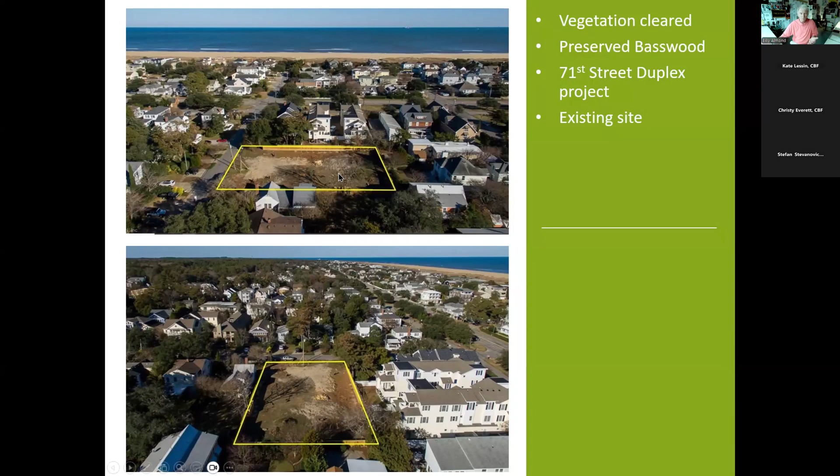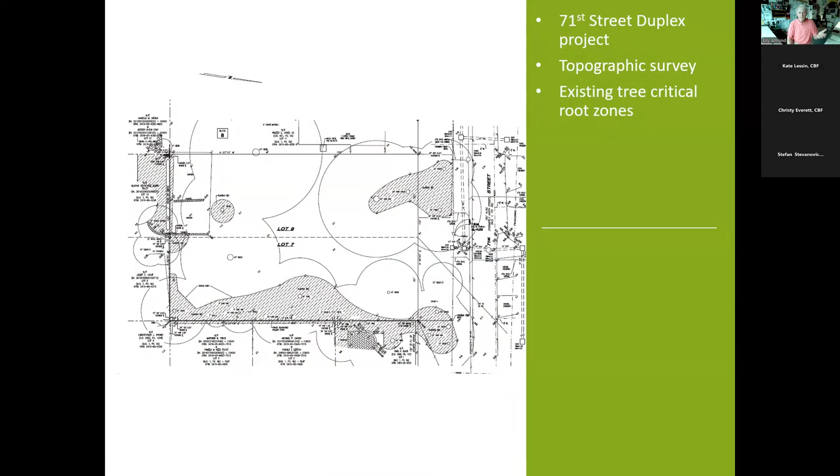The vegetation was cleared, but we were able to preserve a huge basswood in this location. And you can see here how critical it is on surveys that we work with that the actual drip lines of these trees are portrayed so we know how to design around them, because as Stefan said earlier, 65% of the critical root zone is under the drip line. The other 35% is out of the drip line. So it's really important in terms of tree preservation.

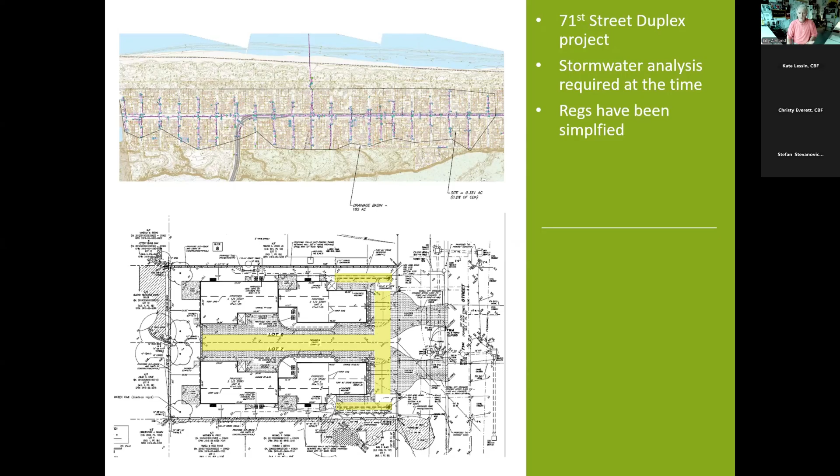We also had to do an enormous amount of stormwater modeling. Our site is located in the middle of this drainage area, but we had to model about 7 or 8 blocks in both directions, and finally came up with a use of porous concrete with a StormTech system underneath that has gravel, and that is how we met our stormwater management requirements for that site.

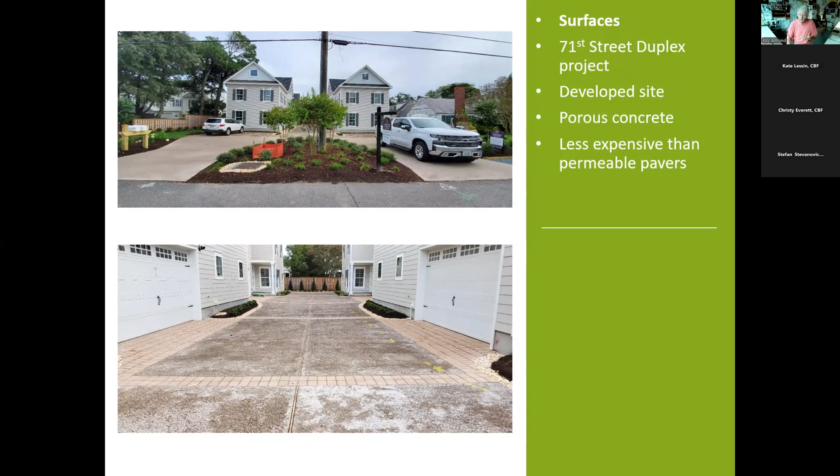You can see here a model of construction and the actual construction here. This is all permeable concrete. It looks rough when it's first poured, but this entire driveway, except for these paver bands, is porous. And so that's just how we're doing this on a residential scale.

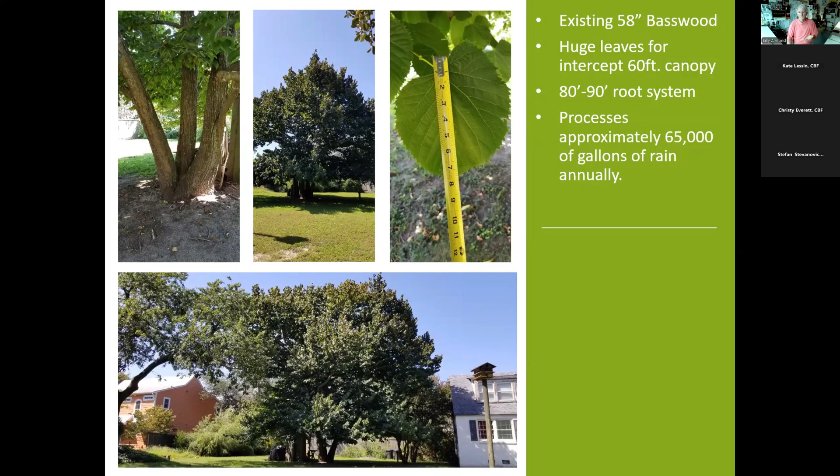This basswood was processing a tremendous amount of gallons of water. Dr. McLaughlin said it was over 65,000 gallons of rain annually, just one tree. And one of the things that he brought up to us, with an 8-inch leaf surface, there's a certain amount of intercept, rainfall that never hits the ground. When it starts raining, what is the first thing we do? We run underneath a tree. And so there's a part of the rainfall event that never actually hits the ground if you have that kind of canopy. And so we've been able to save this tree in perpetuity.

We look forward to increasing the DEQ regulations with regards to tree preservation and furthering bills in the General Assembly to support that.

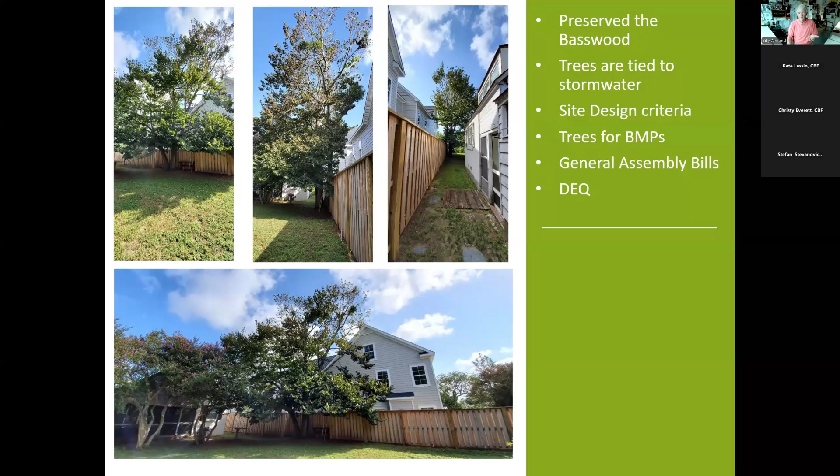Thank you, Billy. Really great presentation, and I love the local examples and talking about their performance history, as well as some of the upcoming projects in our community. That's really exciting. We can learn from those owners.